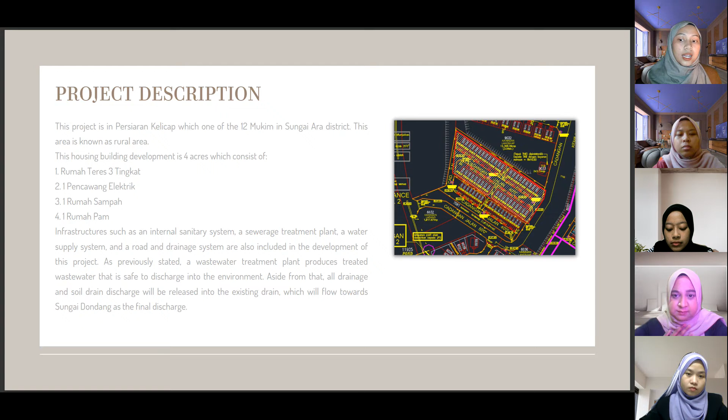As previously stated, a wastewater treatment plant produces treated wastewater that is safe to discharge into the environment. Aside from that, all drainage and soil drain discharge will be released into the existing drain, which will flow towards Sungai Dondang as the final discharge.

Next, we move to the project scheduling. The project starts on Wednesday, 3rd February 2021, and ends on January 12, 2026. Below attached is the project CPM.

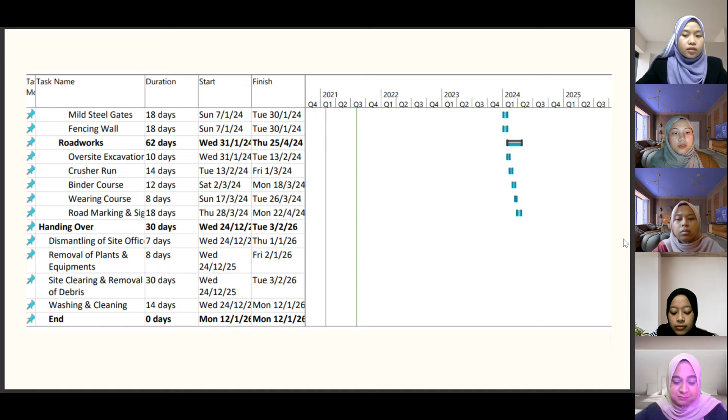Moving on to the structure. This is the design specification for the structure design. Characteristic of compressive strength FCK is 30, and characteristic of yield strength FYK is 460 N per millimeter square.

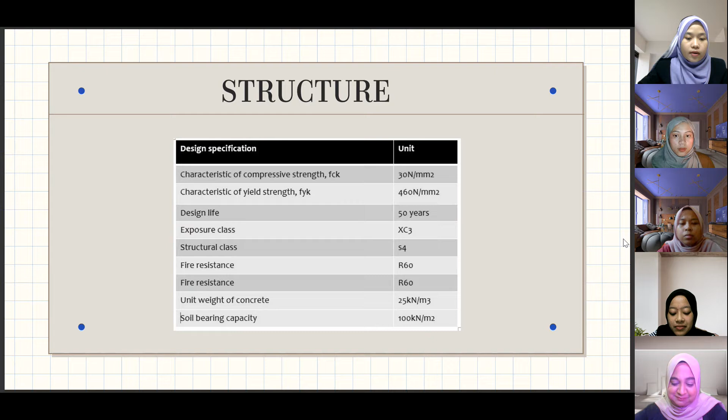Design life for 50 years. Exposure class XC3. Structure class S4. Fire resistant R60. Unit weight of concrete is 25 kilonewton per meter cube. And for the soil bearing capacity, 100 kilonewton per meter square.

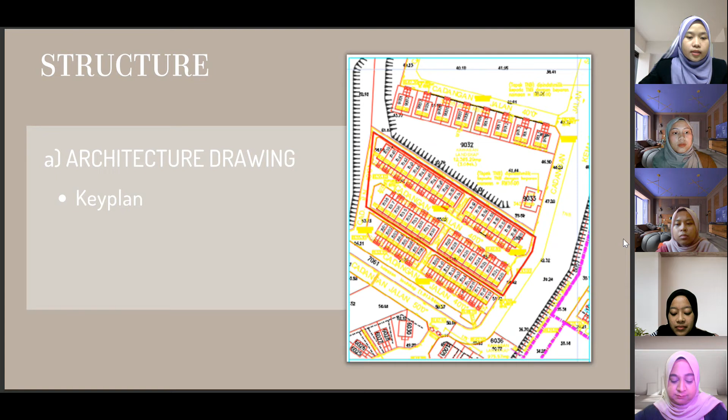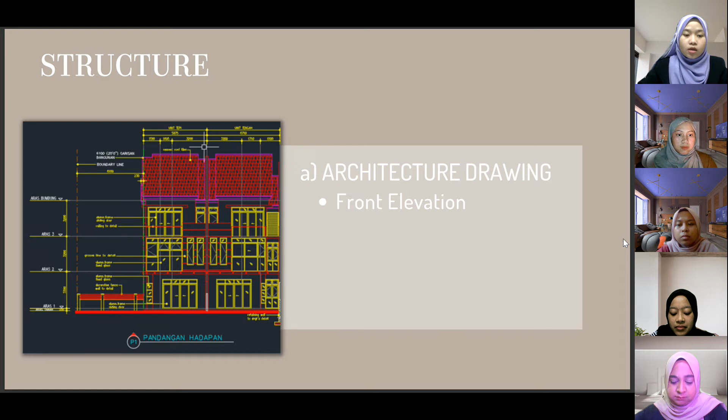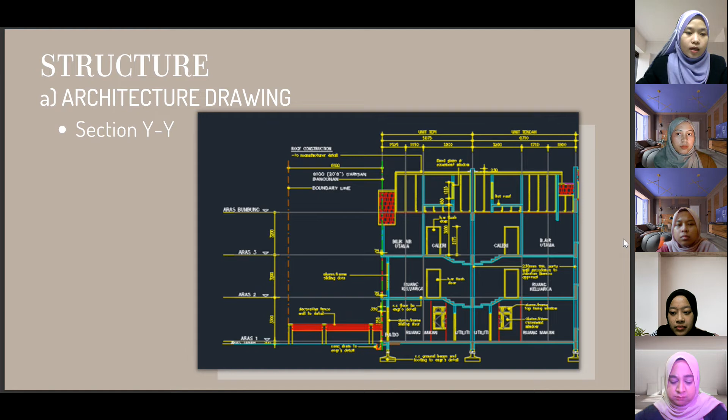Next, this is the architecture drawing, which is the key plan on the site. This drawing consists of the front elevation, right elevation, and left elevation, and section XX, and section YY. We also have a 3D layout from the Esteem result, starting from ground floor until roof floor.

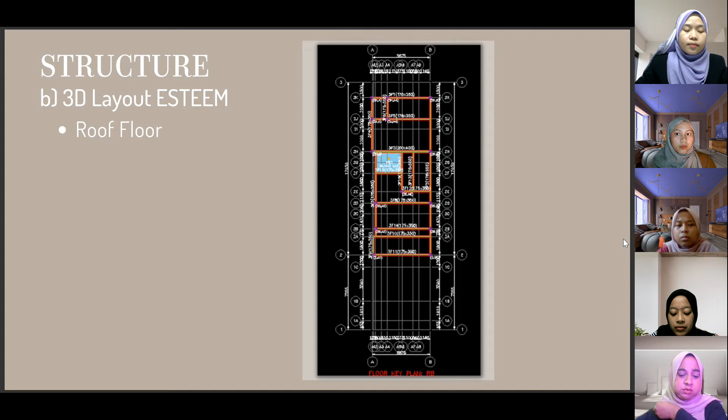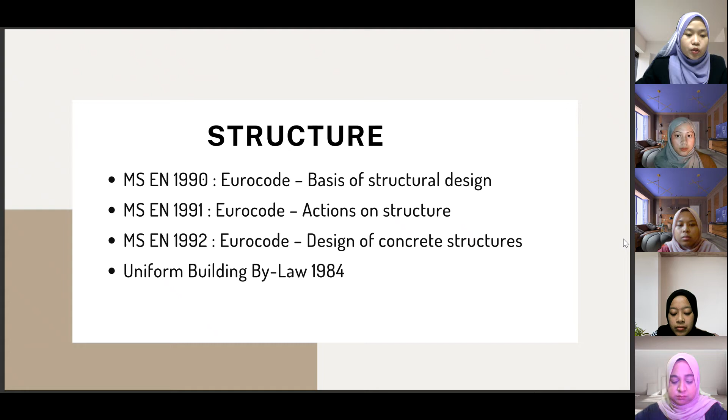Next we will see the 3D view for our building structure. Move to the structure using the Eurocode basis of structure design. We also have action on structure and Eurocode design of concrete structure, and also Uniform Building By-Law 1984.

Next we move to the slab, which is FS3 for our manual calculations. This is all the parameters from manual and esteem calculation, and also percentage difference.

For slab, we have used a sample simply supported slab, which is FS3 from ground floor, slab size which is 2,100 by 2,825 mm, and load involved, which is self-weight of slab, finishes, water tank, and also variable action.

Reinforcement bar for this slab is H7 200 for manual calculation and H10 250 from the esteem result.

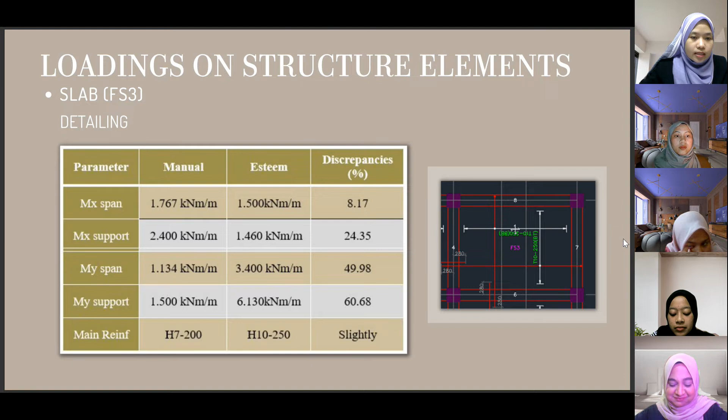Next, for the beam, we have a sample of continuous beam, which is GB5. Span for the beam is 5,875 millimeter. Beam size is 250 by 350. Load involved for this structure calculation is self-weight of beam, self-weight of brick wall, and also slab load transfer. Reinforcement bar from the manual calculation is 2H12, and from the esteem result 2H16, which is a difference.

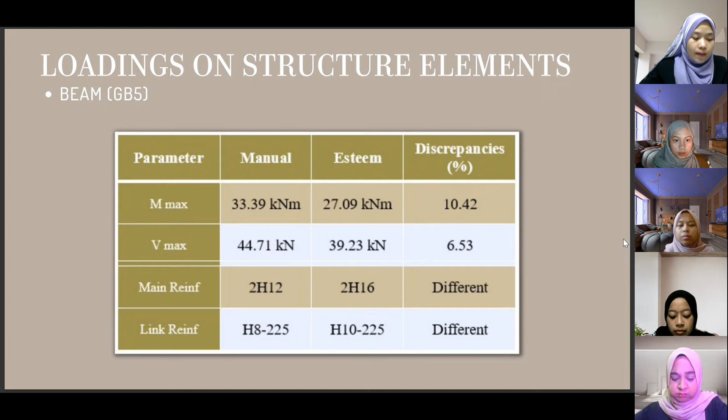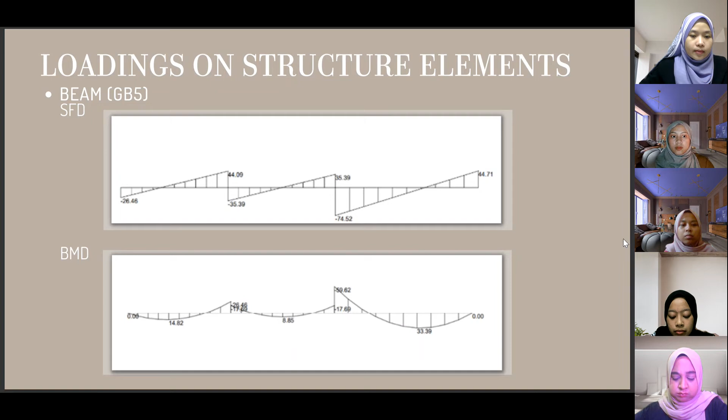Next, we move to the beam SFD and BMD diagram. We also have the detailing for the GB5 beam, which is 250 by 350.

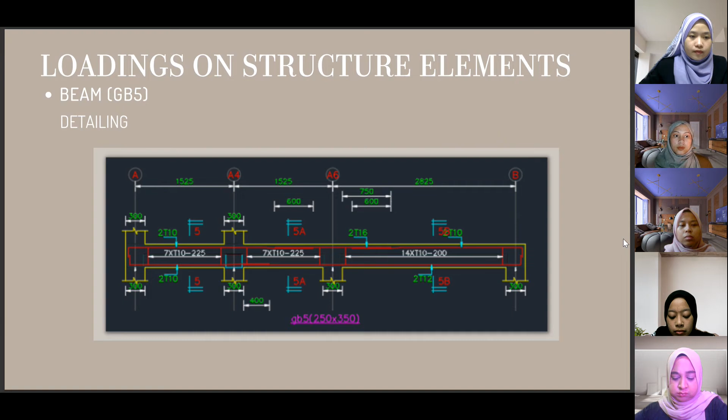Next parameter we have for the columns, which is 2J/B, which is C15. For the manual calculation and esteem calculation, we have a difference. For the manual, we have 6H16, and from the esteem we got 4T12, which is a big difference.

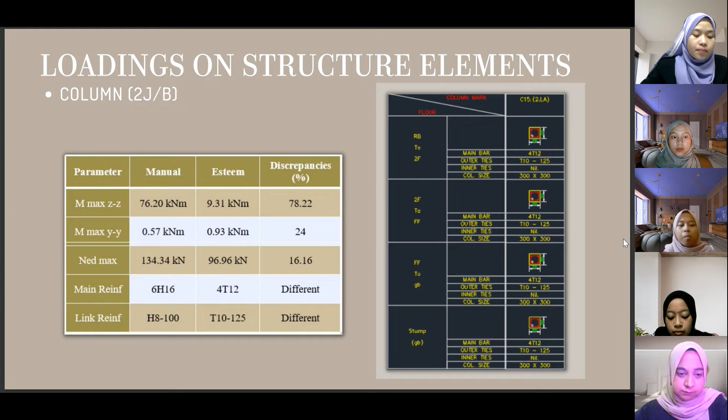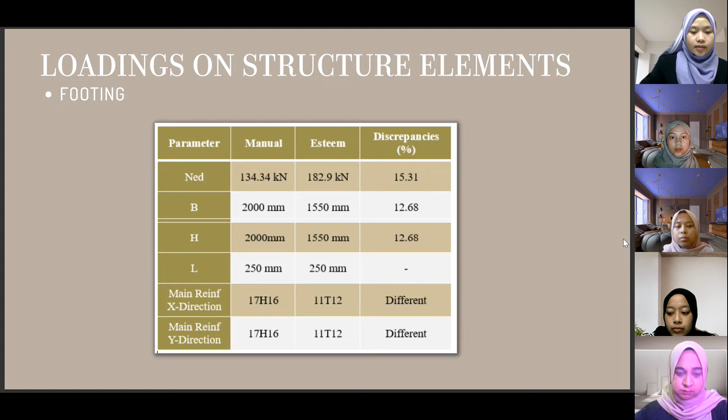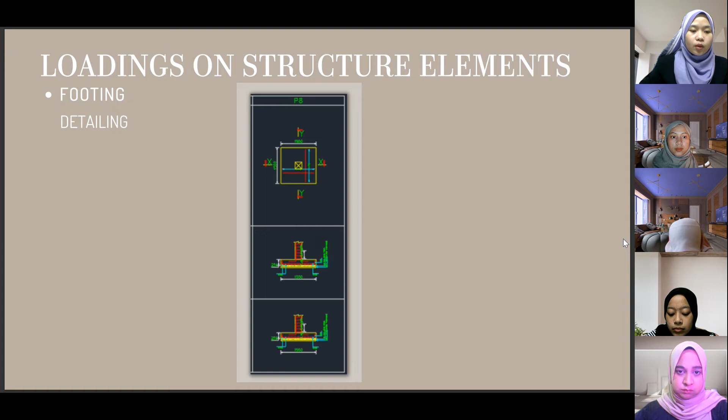Next, this is the detailing from the footing, which is P8. And lastly, we have a staircase detailing.

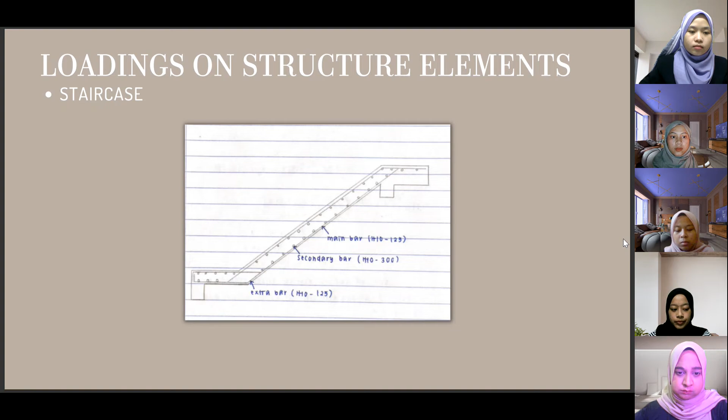I will present about the earthwork design.

Engineering projects that include the processing of large amounts of soil or unformed rock on Earth's surface. The original ground contour is complicated as the highest level of the ground from calculation is 62.76 meters, while the lowest level is 36.7 meters. The difference between them is 26.06 meters.

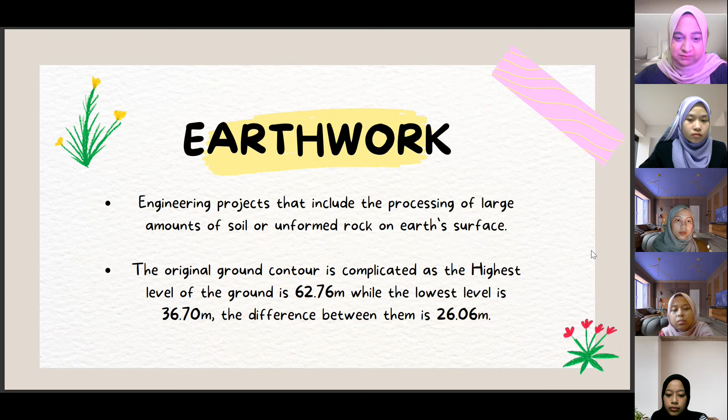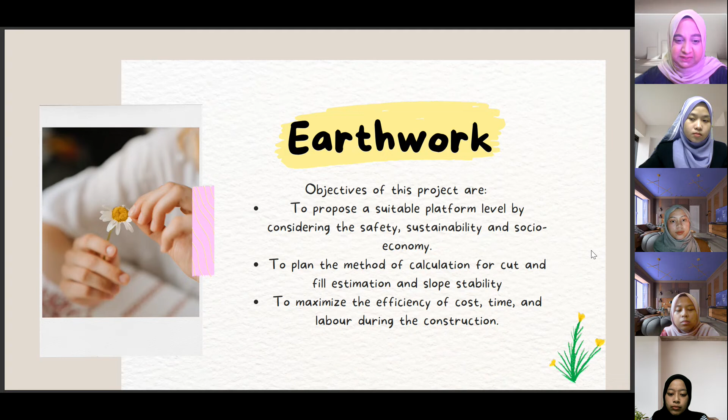The objectives of this project are to propose a suitable platform level by considering safety, sustainability, and socio-economy; to plan the method of calculation for cut and fill estimation and slope stability; and to maximize the efficiency of cost, time, and labor during construction.

Proposed level should be done based on the existing topography of the site area. The proposed level for each zone was determined by the highest and lowest point of that zone, and generally the formation level is the average reduced level of these points, in order to balance cut and fill that can minimize the import of soil material and reduce the overall cost of construction.

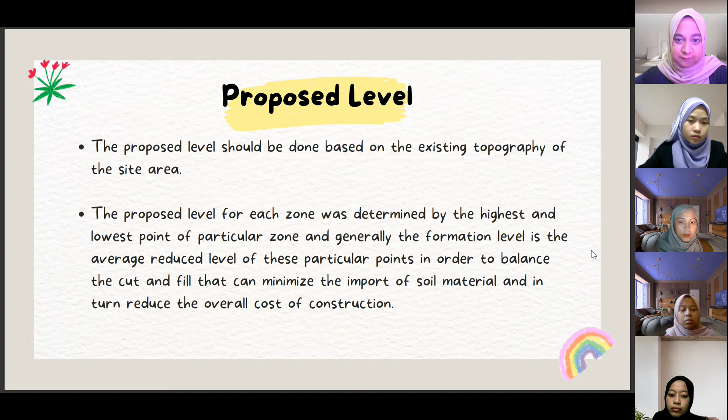The method used for cut and fill is the grid line method calculation. The total volume cut is 23,894.4 meter cube. The total volume filled is 19,337 meter cube. The difference between cut and fill is 19.07%. Hence, only 19.07% is the difference percentage between cut and fill volume to cover up the earthwork activities.

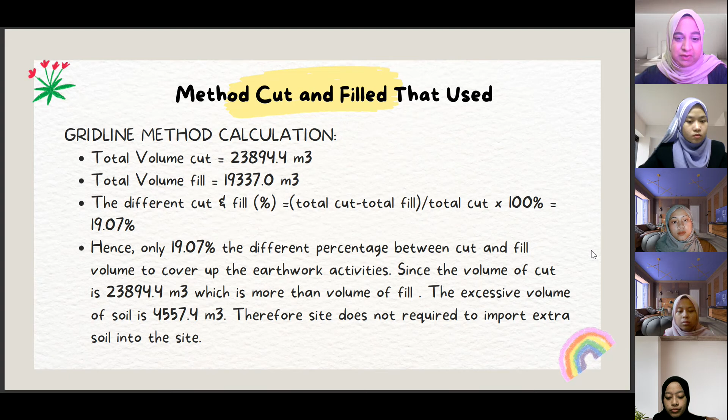Since the volume of cut is 23,894.4 meter cube, which is more than the volume of fill, the excessive volume of soil is 4,557.4 meter cube. Therefore, the site does not require importing extra soil. For the grid method, the size of grid is 20 meter times 20 meter.

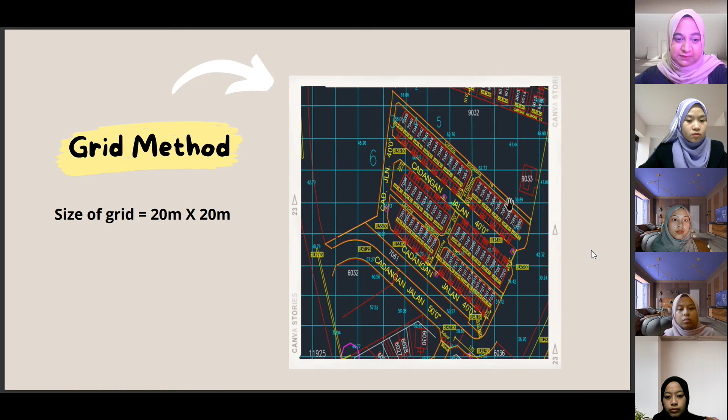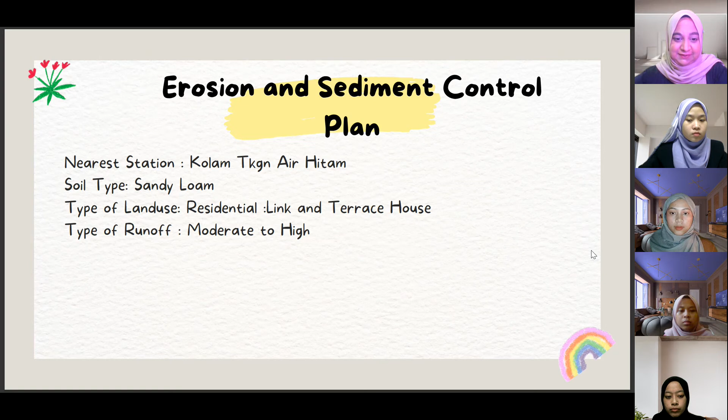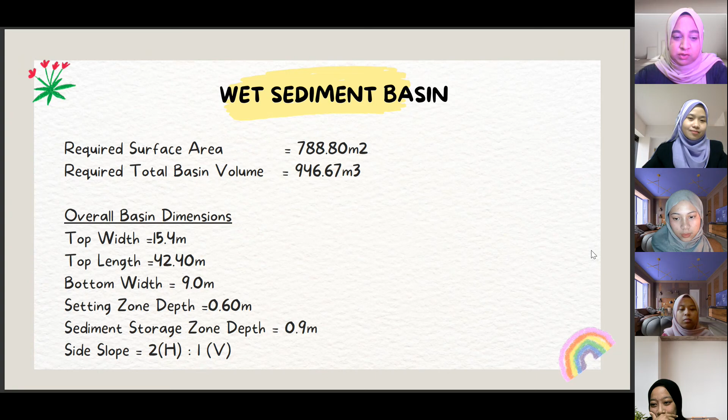Washing bay design installation: first, clear the location. Place and compact a 150 mm thick layer of minimum 50 mm rock over the roadway between the wash bay and the sealed street. Wash bay must be located near the sedimentation basin.

For the maintenance, inspect the wash bay during rainfall daily. When the layer of rock is no longer keeping the wash bay functioning, another 100 mm rock layer must be added.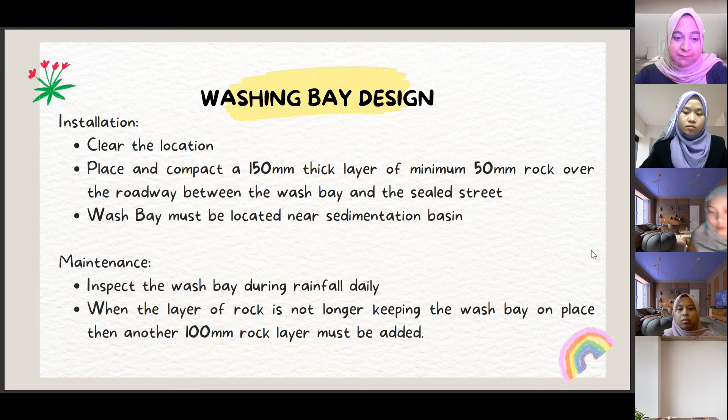Next, we move to the road and drainage. For the road design standard, specification and guidelines, Pindaan 2013 issued by Jabatan Kerja Raya JKR, there are a few guidelines used for the road design: first, Manual on Traffic Control Device, Standard Traffic Application; second, Manual on Traffic Control Device, Standard Traffic Sign; third, Guide Sign Design and Application; and lastly, California Bearing Ratio CBR report test.

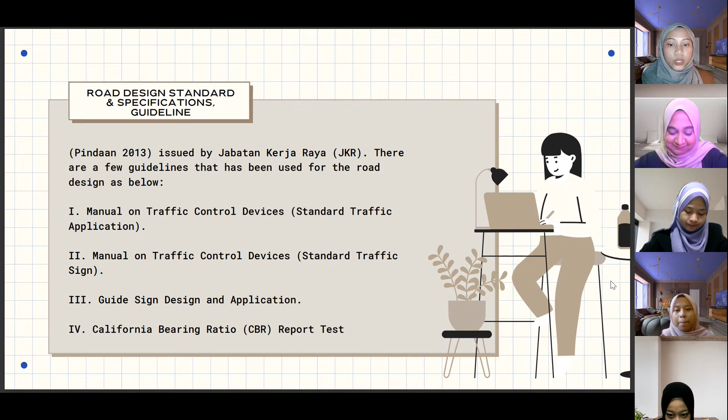For the road design, the terrain type is flat. Road type is one lane in one direction. Carriage width is 5 meters and annual growth rate is 5%.

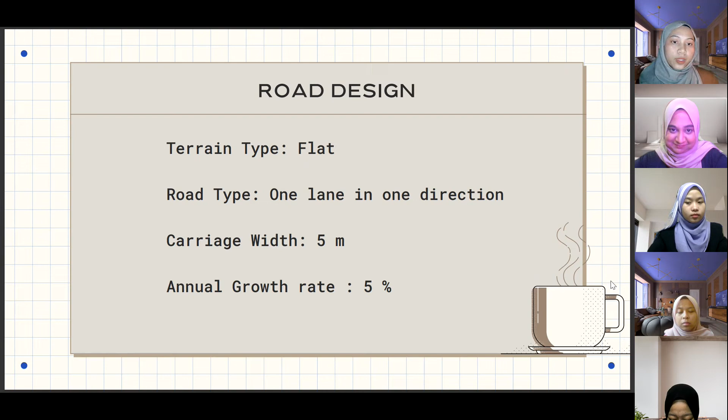For the design procedure, the first step is to list down the pavement design, then calculate the design traffic, which gives a result of 0.0055 million. We also need to calculate the design traffic covering 20 years, and the result shows the traffic category is T1.

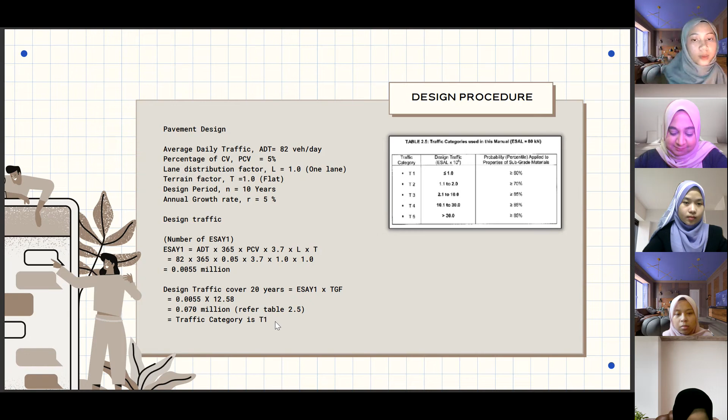For the pavement structure, we list down based on the table and calculate the volume of daily traffic after 10 years. The result shows 50 vehicles per day per lane. For the 1-hour hourly capacity, the result is 640 vehicles per day per lane. For the 24-hour one-way traffic capacity, the result is 6,400 vehicles per day per lane.

For the conclusion, 6,400 is more than 50, which means the capacity has not been reached after 10 years.

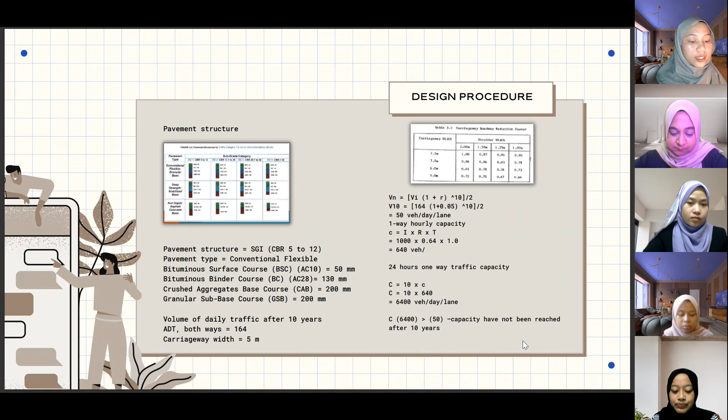For the drainage standard and specification, the following is the goal: firstly, to create an effective drainage system to address the flooding issue; second, to reduce surface runoff of the carriageway. There are a few requirements and standards that are utilized and approved in this drainage design guideline.

First is the guideline from the Urban Stormwater Management, MASMA. Second is from Wali's Infra. Third is the Manning formula. The specification used for maximum surface slope is 1/300, and the Manning roughness for concrete is 0.018.

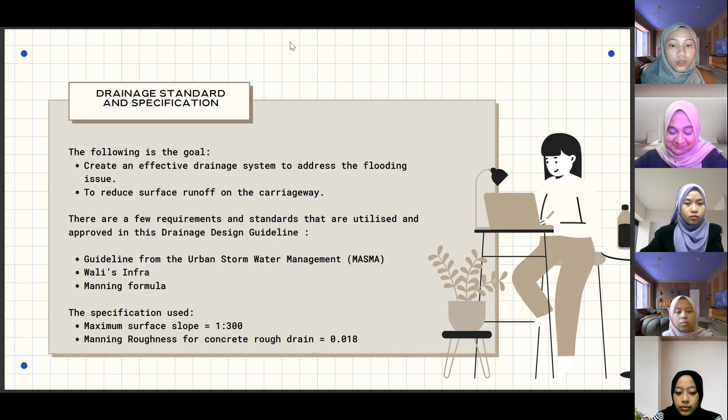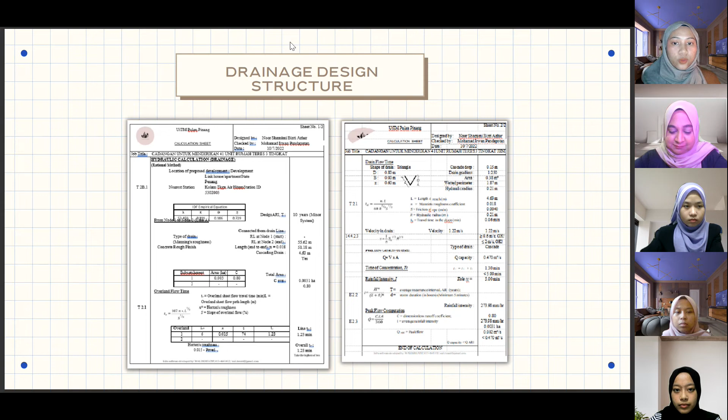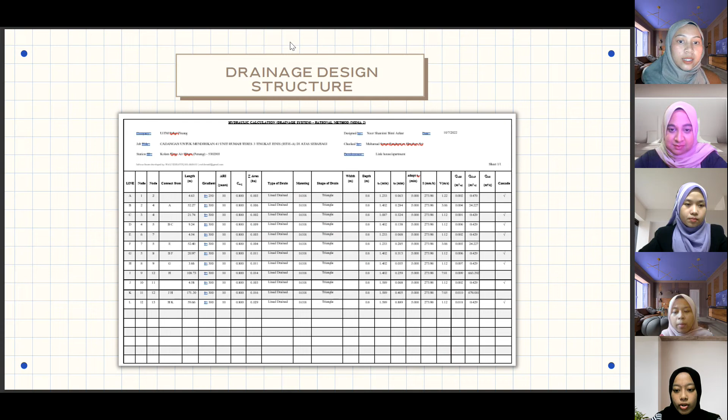This is the sample calculation from the Wali's Infra software. Same goes for this one. This one also shows the hydraulic calculation for the drainage system. So, next is sewerage design.

The project brief. As a civil engineer consultant, SAAMS Consultant has been hired to develop the infrastructure for this project, which is cadangan untuk mendirikan 41 unit rumah teres 3 tingkat di atas sebahagian lot 12025 Mukim 12 daerah Barat Daya di atas persiaran Kelicap Pulau Pinang.

Including the sewage system, the design of the development's proposed exterior sewage system will be presented in this report. The goal of this project is to design the facilities for the residential areas at the Persiaran Kelicap in Penang, which includes the structure, road and drainage, water reticulation, and sewerage.

The objectives of this project are to present a comprehensive design concept for the development's sewage system, to identify and analyze the proposed design and the design considerations made during the design process to ensure it's suitable for the development, and to provide a reference for the design outline and method, as well as guidelines and parameters used in the design process.

Lastly, to obtain approval for the anticipated sewerage improvement, the full design must be submitted to the Indah Water Konsortium, IWK, together with the drawings and the report.

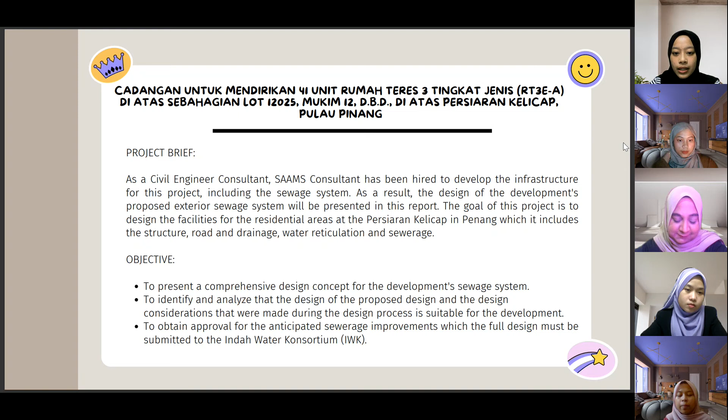Next, these are the standard guidelines for the sewerage design. There are 3 parties involved, which are SPAN, Suruhanjaya Perkhidmatan Air Malaysia; IWK, Indah Water Konsortium Sendirian Berhad; and the Code of Practice for Developer on the Design of Installation Sewerage Design System.

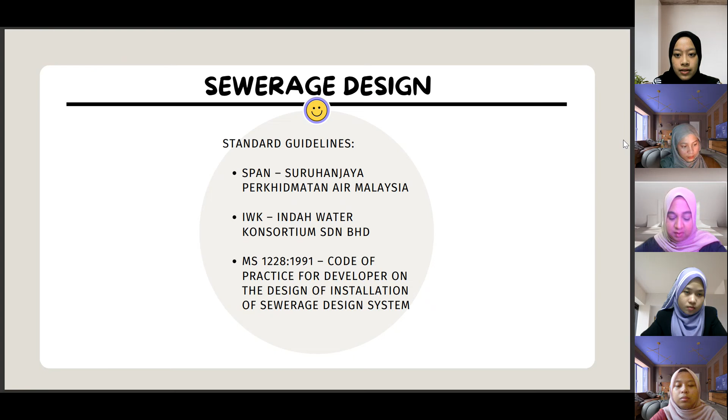Next, this is the design specifications. Firstly, the design is according to the amount of sewerage discharge per person. As for the material used, it is vitrified clay pipe, VCP. The diameter of the pipe is 225 millimeter. As for the gradients of slope, it is 1/50, 1/100, and 1/125.

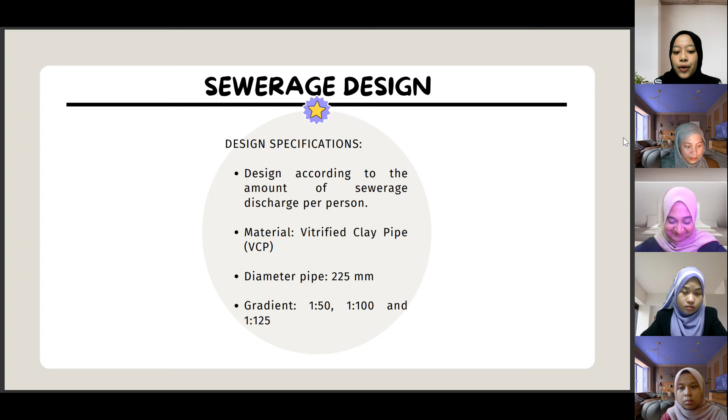Next, this is the sewerage system layout. As we can see, each manhole covers 3 to 6 houses, which eventually flows to the sewerage treatment plant, STP, located at the lowest platform inside the site boundary. The STP would receive the produced discharge or sewage after being channeled away from the buildings via a network of pipelines.

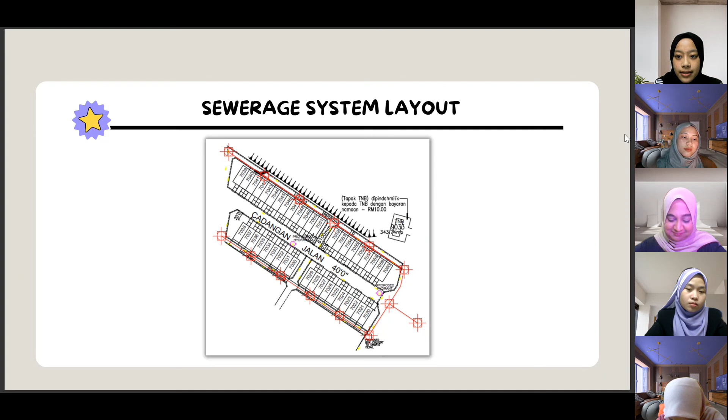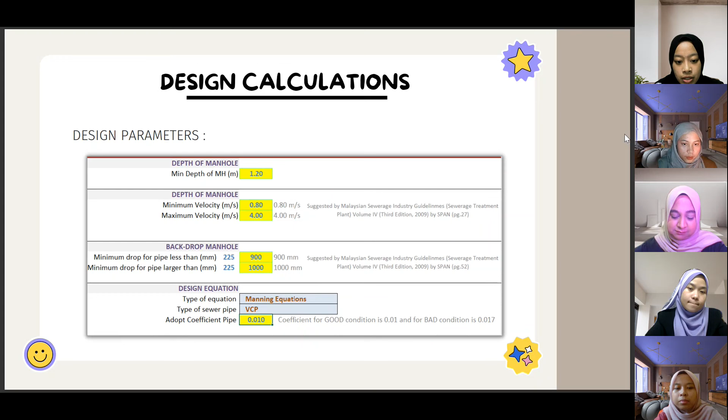Next, this is the design calculations, which are the design parameters. As for the depth of the manhole, the minimum depth is 1.2 meter. And for the design equation, the type used is Manning equation. The type of sewer pipe is VCP. As for the adopted coefficient of the pipe, it is 0.01, which is good condition.

Next, this is the population equivalent. The population equivalent that we got is 205, while the adopted PE for STP is 300, which needs to be more than the total PE.

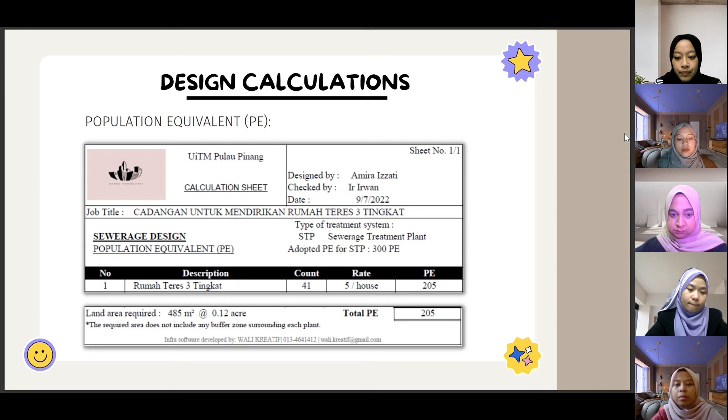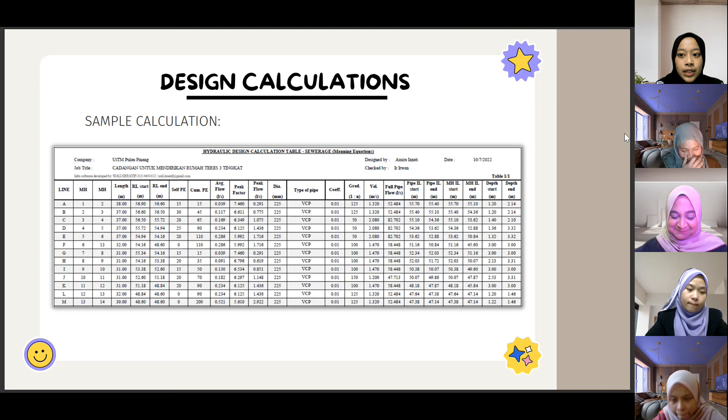This is the sample calculation. The table shows the data and results that we got from the Wali software. This is the sample calculation for the sewerage design from the Wali software.

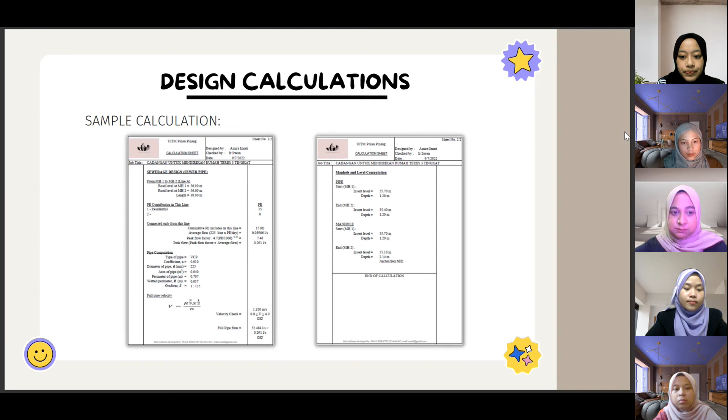Now I will explain to you about water reticulation. The purpose of this report is to explain in detail to Perbadanan Bekalan Air Pulau Pinang the consultant's design concept, daily water demand and capacity of water tank, and hydraulic piping calculation of the water reticulation system. The second purpose is to seek approval upon submission of the design concept with the detailed drawings. The source of water for this project will be tapped from the existing Perbadanan Bekalan Air Pulau Pinang reticulation main pipe.

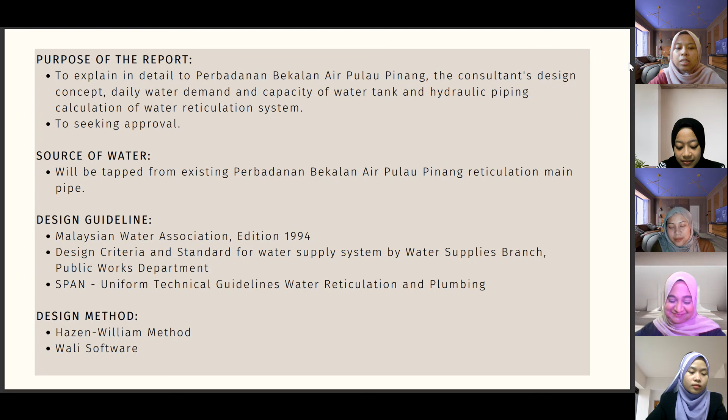The design guideline for this water reticulation system is the Malaysian Water Association, edition 1994; Design Criteria and Standard for Water Supply System by Water Supplies Branch, Public Works Department; and lastly, SPAN Uniform Technical Guidelines for Water Reticulation and Plumbing. The design method for this calculation is the Hazen-Williams method and Wali software.

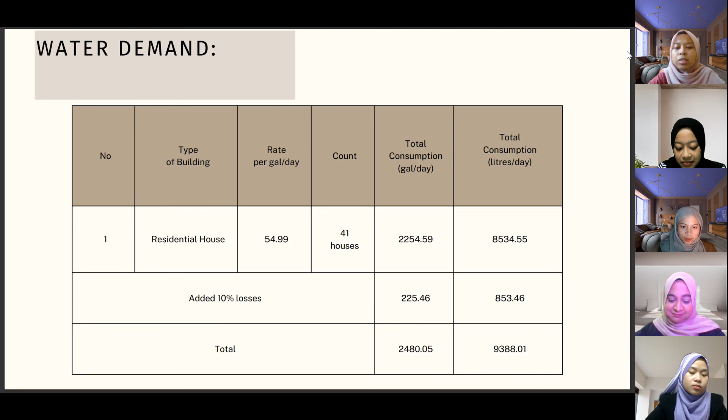This is the calculation of water demand for this project. The type of building we are constructing is residential houses. The rate per gallon per day is 54.99. The quantity of houses is 41. The total consumption in liters per day is 8,534.55, and the total after adding 10% losses is 9,388.01.

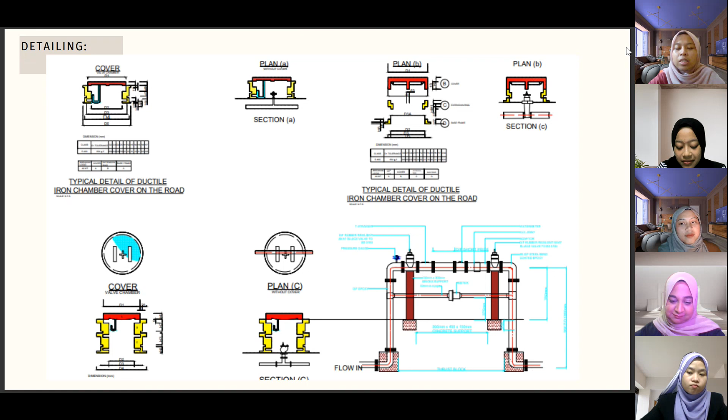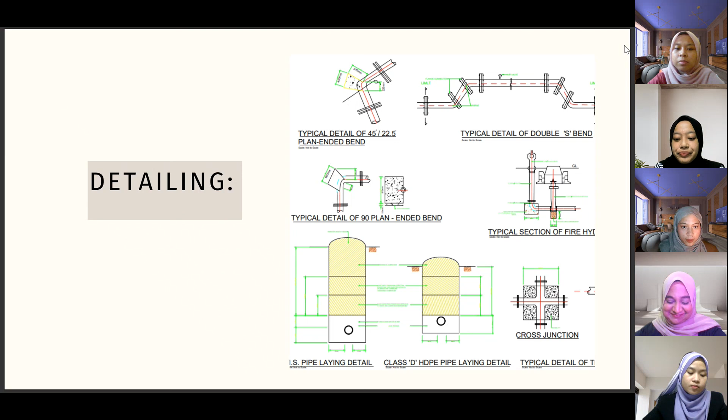This is the detailing for the water reticulation system for this project. This is the detailing for the pipe that we use for this project, and this is the detailing for the valve that we use for this project.

Next, now for project costing. For project costing, the reference we use is the Schedule of Rates, SOR, by Jabatan Kerja Raya 2019.

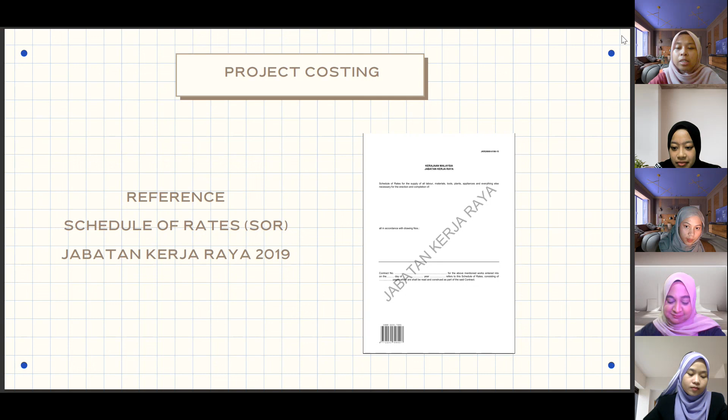For the structure element, the bill of quantity is for the slab, amounting to RM23,908.47. For the beam it is RM30,321.96. For the column it is RM13,719.62. For the foundation it is RM7,127.64. For the staircase it is RM2,105. And the total for one unit is RM77,182.69 for structural element.

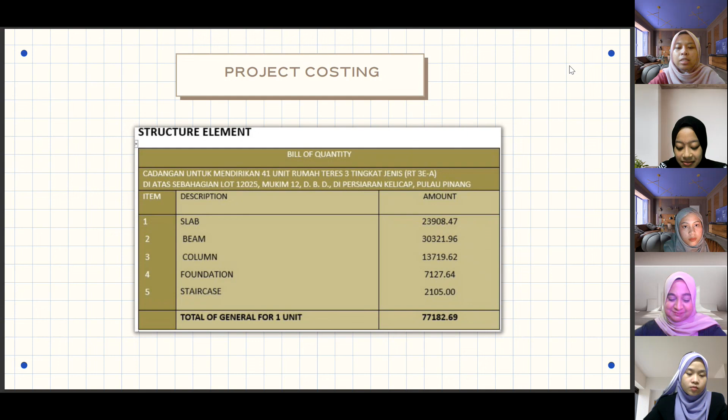For the overall section, structure is RM77,182.69. For earthwork element it is RM457,478.74. For road and drainage it is RM534,510.57. For sewerage it is RM105,480.45. For water reticulation it is RM75,409.44. And the total general summary is RM1,250,059.85.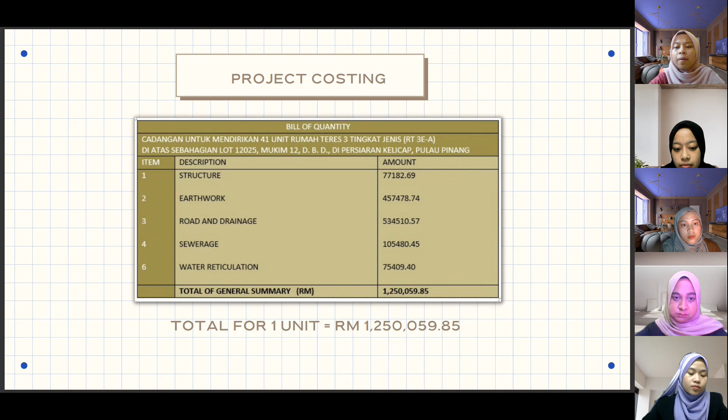Consultant Sendirian Berhad has proposed the structure and infrastructure design of the project site with an overall cost estimate of 51 million, and is planning to execute the project over 4 years. So that's all from us. Thank you.